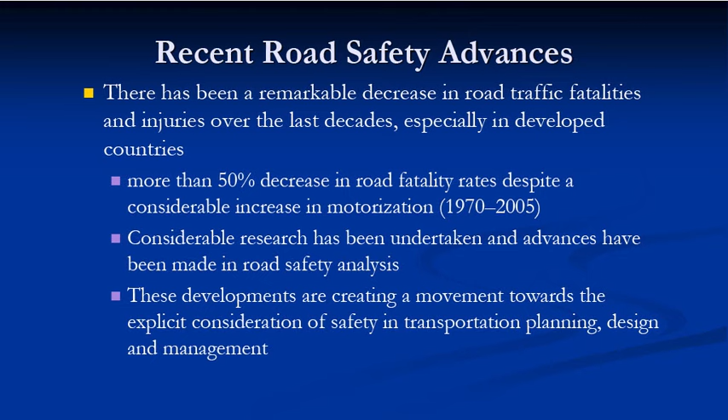The good news is that there have been significant advances made over the last decades in road safety. We have about a 50% reduction in fatalities, despite an increase in traffic volume and mobility. We have done a lot of research and made a lot of advances, and these advances are creating a movement towards explicit consideration of safety in transportation planning, design, and management. So this is the good news.

However, we also have some problems we need to take care of. Despite these recent advances, there are challenges complicating the future direction of road safety. Those of you familiar with fatality rates know that in recent years the fatality rate curve has flattened, and in many countries it is starting to increase. So the significant reductions we achieved in the past are not continuing. These challenges, in my opinion, include four main points. Most traditional research on road safety focuses on statistical techniques to model collisions.

We don't understand very well. Less attention has been devoted to improving our understanding of collision factors and how safety measures work. We just use police reports and numbers of accidents to fit a regression model and say we're going to use this regression model to identify black spots and treat them. Reliance on collision data is reactive, and it has fundamental ethical and practical issues.

This is extremely important. It has a fundamental ethical issue. To identify a location as having a safety issue, we need to observe collisions first. So to prevent fatalities, we need to observe fatalities first. People should die first before we intervene to make a location safe. Doesn't make a lot of sense.

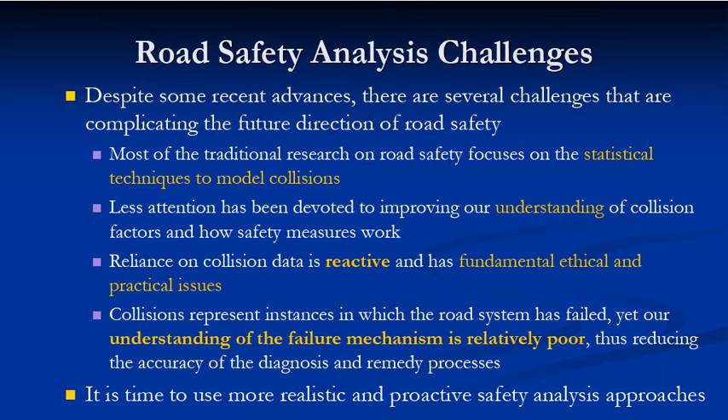Collisions represent a situation in which the road system has failed. Yet, our understanding of this failure mechanism is poor, which reduces the accuracy of the diagnosis and remedy process. It is time to use a more realistic, proactive approach to improve road safety.

So what are the new trends in road safety analysis? I'm going to list all of them, but I'm going to focus on the last four items. Explicit evaluation of safety impacts. Safety used to be an implicit evaluation based on expert knowledge and expert opinion. But now it is explicit, a separate evaluation from any other thing like travel time, delay, and mobility. We are quantifying that. We have the ability to estimate the number of collisions associated with a specific design or a change in a specific design.

We are moving away from rigid standards and warrants. It is not either we meet the warrants or the standards or not. It's now flexible. We can make a specific design safer by doing some changes. It is not yes or no.

We are going proactive. We are not waiting for collisions to happen before we intervene. We are using safety surrogates, and in my opinion, this is one of the most important advances that took place in road safety analysis—that we're not using collisions anymore. We're using safety surrogates such as traffic conflicts. We are including road user behavior in our safety analysis, which we couldn't do before because we didn't have the technology. And we are very excited about the new era of smart mobility and big data, which will allow us, for the first time, to do real-time safety optimization, something we couldn't do before.

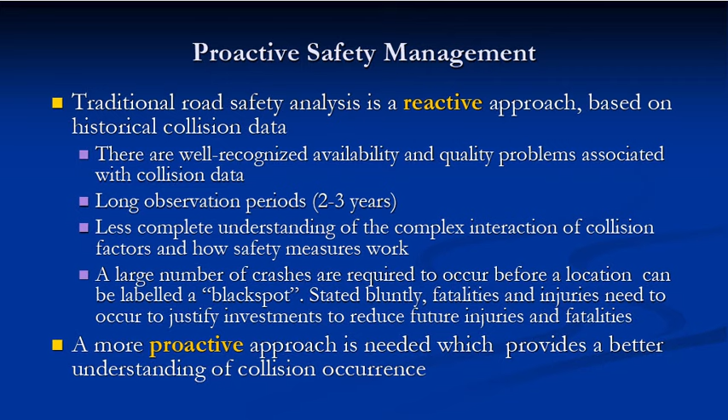So, stated bluntly, fatalities and injuries need to occur to justify investment to reduce future collisions. That's the reactive approach, with some unethical issues in my opinion. We need a more proactive approach, and this is where we go to surrogates.

So we started working on traffic conflicts. This started in Europe, actually, in 1980 or so, where people said let's use near misses or traffic conflicts. This is a very famous safety pyramid that many of you are familiar with. They said if we rank all interactions on this scale, you will find fatalities and injuries at the very top, followed by near misses, serious conflicts, less serious conflicts, and then undisturbed interactions.

But actually, this didn't go anywhere. There was a lot of hype about using conflicts in 1980 or so, but it didn't go anywhere, because the cost of collecting this conflict data was very high—it was done manually—and the reliability of the manual observers was very low.

Until about 2005 at UBC, my university, we decided we could automate this process using video analytics. So we started working in 2005, and we had our first system capable of detecting near misses automatically in videos in 2006. That was 16 years ago.

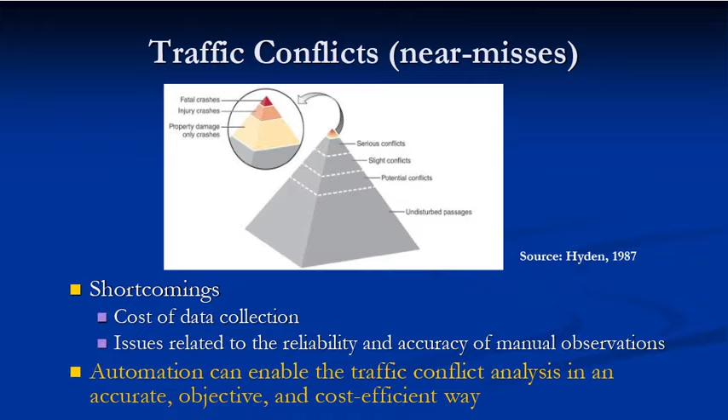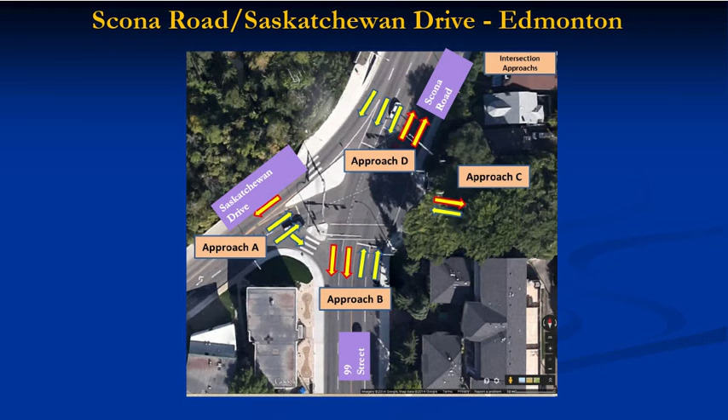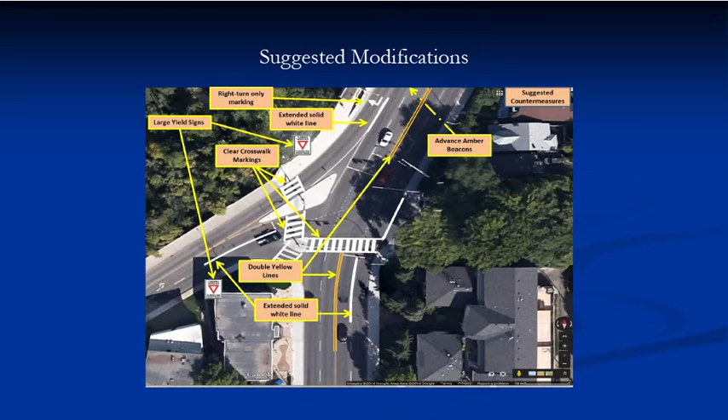And we can do before and after evaluation, which is a big application in road safety. We want to know whether the investment we make in improving road safety is working or not. With collision data, we need to collect about 3 to 4 years of collisions before and 3 to 4 years of collisions after, to do a proper statistical analysis. We produce all of these heat maps of where the problem areas are, and we get countermeasures, we implement them. This location, for example, did not see a collision following the treatments implemented for the last 5 years.

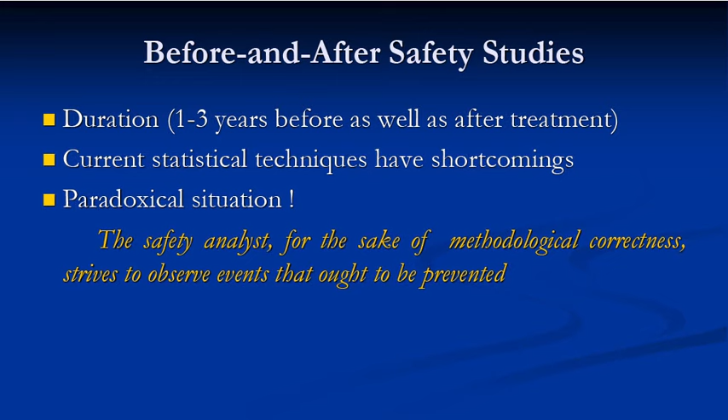And we can do before and after evaluation, which is a big application in road safety. We want to know whether the investment we make in improving road safety is working or not. With collision data, we need to collect about 1 to 3 years of collisions before, 1 to 3 years after, to do a proper statistical analysis. Not only that, we are interested in seeing collisions so our evaluation would work - we're interested in seeing the events we're trying to prevent in the first place for a proper evaluation, which again doesn't make a lot of sense.

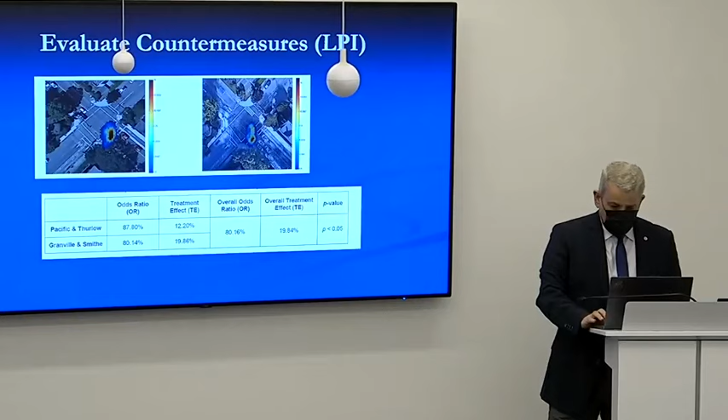You get about 20% reduction, depending on the volume. This 20% can go up to 30, 40% under specific circumstances.

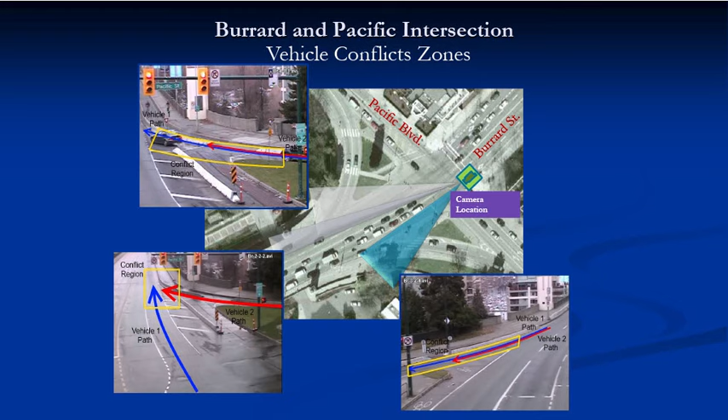This is one of the most important locations in the city of Vancouver, called the Burrard Bridge, where there were many conflicts between vehicles and cyclists going on the bridge. What we did is we closed this right-hand ramp and brought all the vehicles to a signal here. So this was closed, and we brought all the vehicles here.

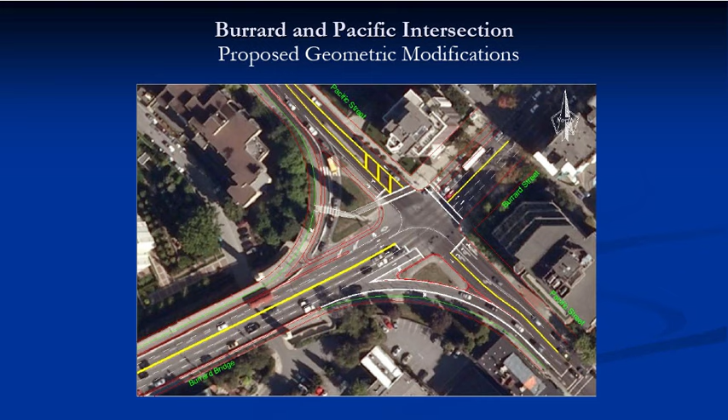And again, you can see immediate results. We did the video analysis, made all the geometric design changes, and you can see what happened to the reduction in near misses. Huge reductions by making the changes following an analysis of a few days as opposed to a few years.

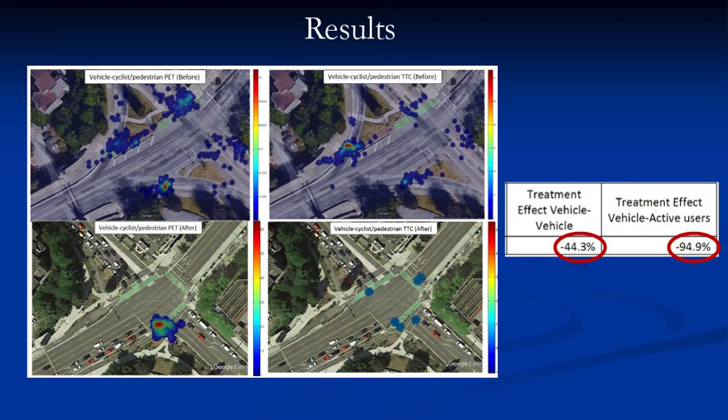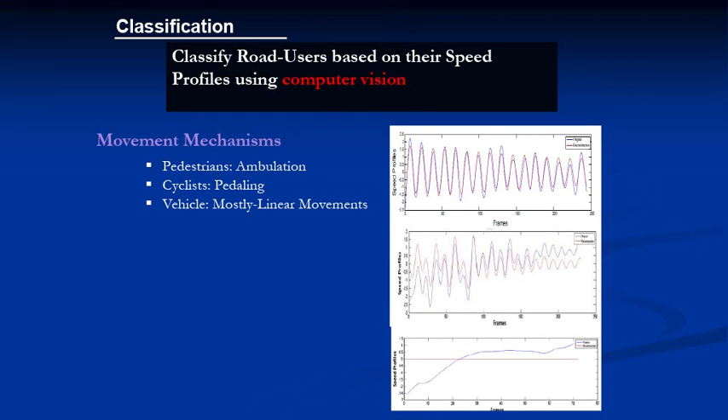So you get very detailed information, and we can use that in classification. We're getting about 85 to 96% correct classification rate, not from the shape of the object, but from the walking mechanism or the speed profile.

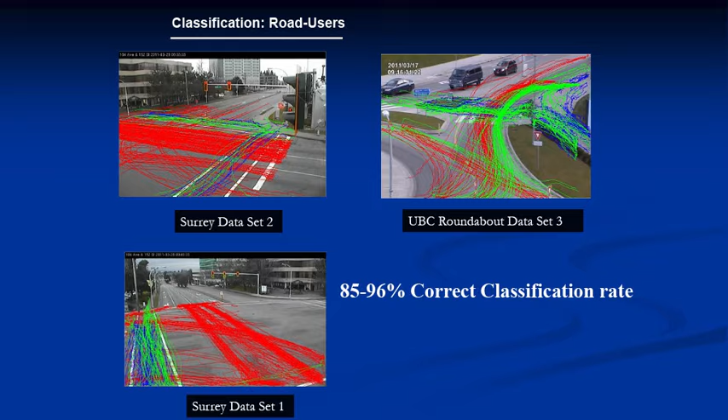We can point to a specific pedestrian, and for example, you're going to see this pedestrian. He will stop to talk to his companion. You see a drop in speed, and then they walk together. You get very detailed information about why things are taking place.

This is crossing speed in downtown Vancouver. A lot of jaywalking, people crossing from mid-block. And you can see that pedestrians crossing on the crosswalks are much slower than these violating pedestrians.

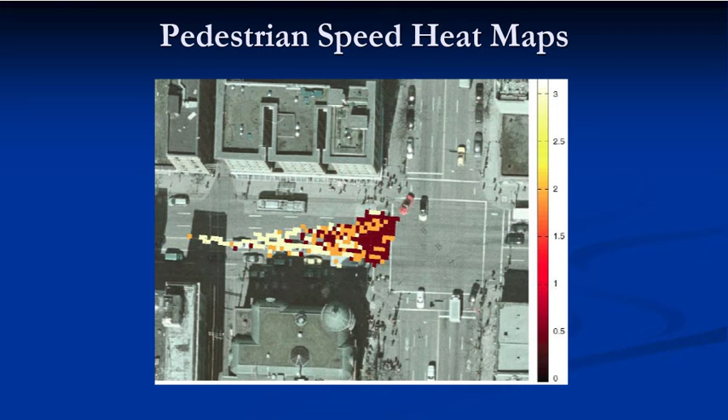This shows you how the crossing speed changes according to what phase you are in. You can see that violating pedestrians are really running at 2.6 meters per second compared to about 1.3 for pedestrians crossing on the walking phase.

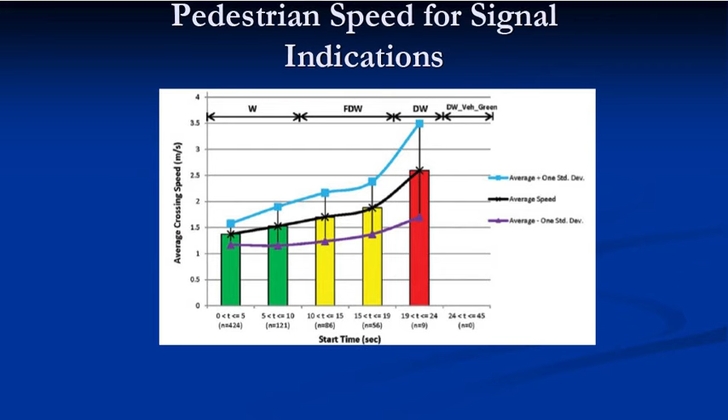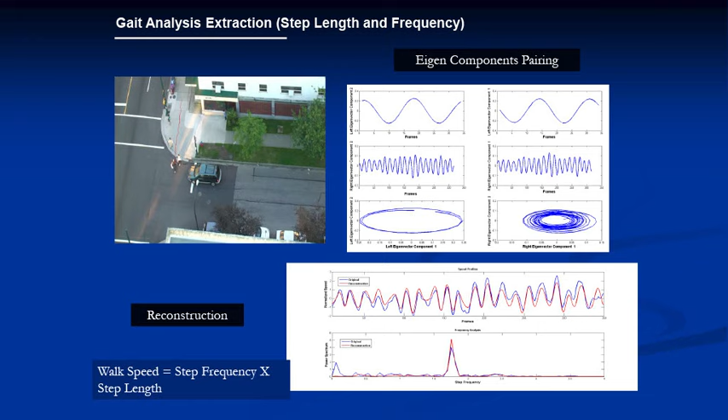As I mentioned, we can analyze the signal, apply all of these pattern recognition techniques. We get the step frequency, and we can get the step length from walking speed equals frequency times length. And we can use that in many things.

In this case, for example, we can classify gender by looking at the different walking mechanisms. Of course, it will never be accurate, but you get about 85% accuracy, just looking at the walking mechanism of the pedestrian without looking at the shape.

We can automatically identify evasive actions. You can see the pedestrian will start running, and here you will see the change in the step frequency.

We can apply some statistical techniques, permutation entropy for example, and you can see the change in the entropy. This value can give you a very good indication of the strength of the evasive action, which can also be used as a traffic conflict indicator.

This is some work that we've done in Vancouver to try to automatically identify pedestrians who are distracted while walking. Again, without looking at the shape, we're just looking at the walking mechanism and the dynamics of the walking mechanism. We get about 80% accuracy because the walking mechanism is quite different than pedestrians who are not distracted.

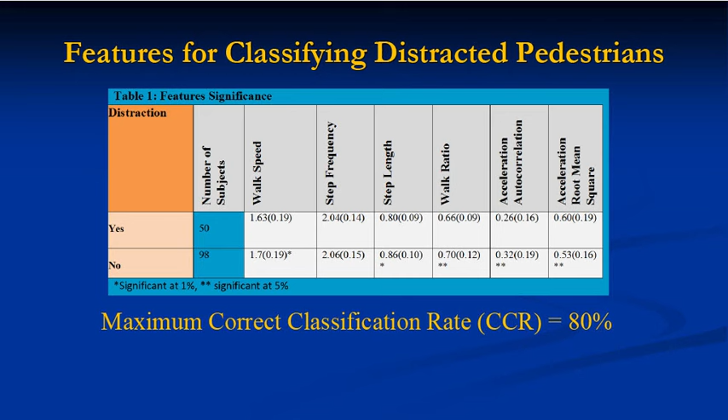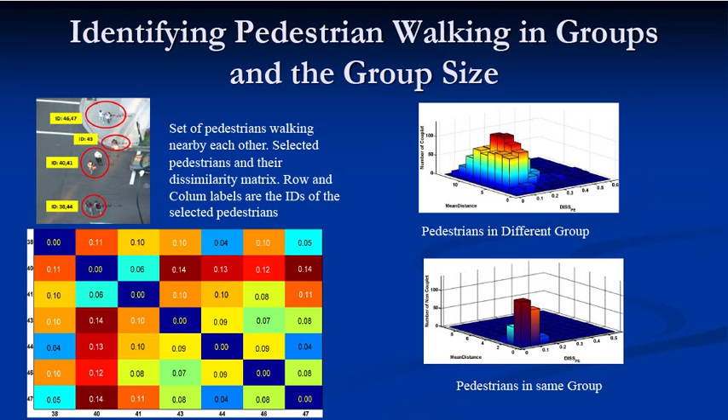We can tell whether pedestrians are walking in groups or individually by matching their gait parameters and speed profile. This is, for example, at UBC, cyclist speed.

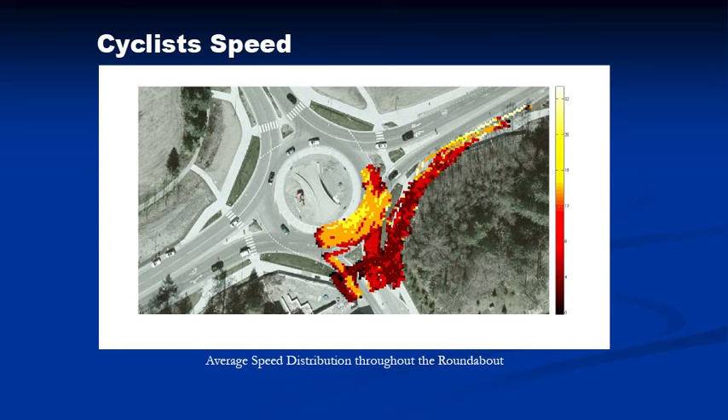You can see that cyclists who are using the sidewalks are much slower than cyclists who are using the regular lanes, and cyclists in the inside lanes are faster. Usually they are the more experienced cyclists.

You can tell whether a cyclist is wearing a helmet or not. You can point to the head, and from the head, you can tell whether there is a helmet or not. It's difficult to collect this data manually, and in this case, we got about 85% accuracy.

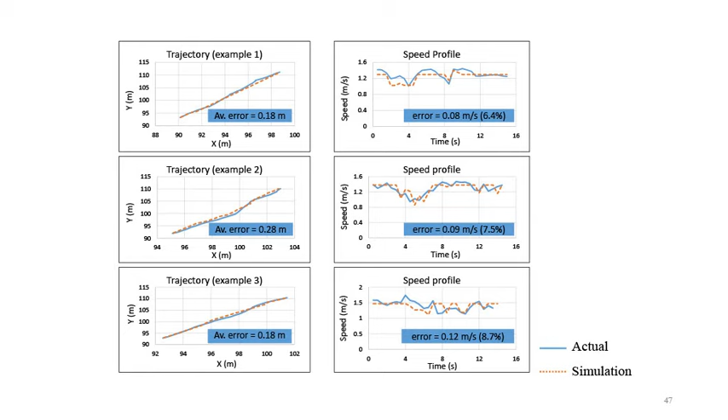We can model pedestrian movements using AI techniques. So we introduce these interactions to an algorithm, inverse reinforcement learning, and we can duplicate how road users are interacting. So when we develop simulation models, we can duplicate the actual behavior of road users in interaction, including conflicts and near misses. We can simulate them with actual behavior of road users.

This is an example from Vancouver. They have a big event in the summer, fireworks, where they close the downtown to vehicles. And in this case, one vehicle, one big van, entered the crowd, and it shouldn't be there. We tried to use our model to mimic how the group of 6 pedestrians here will respond to the presence of this van. You can see this is the actual trajectory versus the simulated trajectory.

And the shape looks not bad at all, how they interacted in speed profile to the presence of this van in the crowd.

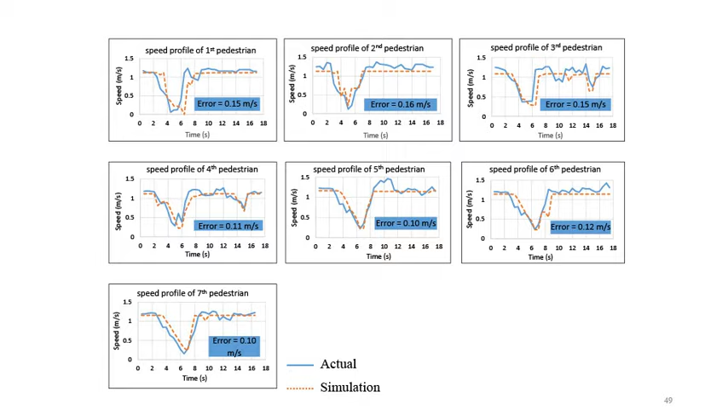The last thing I want to talk about is smart mobility, big data, and real-time safety evaluation. I'm very excited about this area. We are on the cusp of a new era of smart mobility. The application of information and communication technologies will make a huge change in the way we do business: designing, operating, and managing our road facilities.

Autonomous vehicles are expected to provide considerable social and economic benefits. There are still some issues because they haven't been evaluated very well, but we're expecting significant benefits. But in my opinion, this is the most exciting part of the equation: the big data that will be generated.

This big data coming from autonomous and connected vehicles will allow us to optimize the transportation network for road safety in real time, which we couldn't do before. So road safety engineers, when they talk to the traffic engineers, we were always at a disadvantage because we are using collision data.

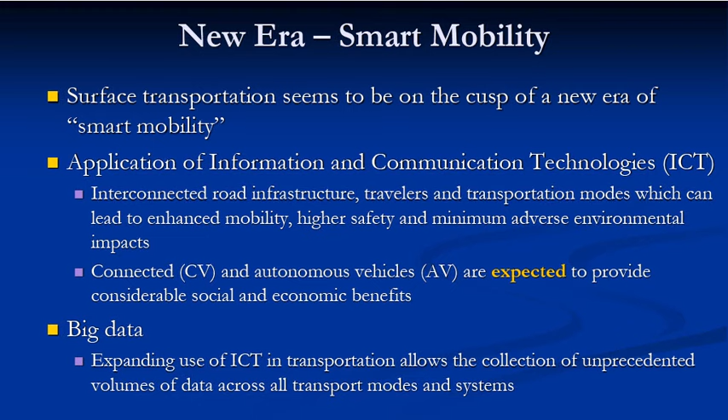They have a measure of vehicle delay that they can get every cycle or every 5 minutes, and they can optimize their system for vehicle delay. They can coordinate signals, they can do many things. We couldn't do that because we couldn't measure safety in real time. Now, with all of this big data, including vehicle trajectories, this will give us a chance of optimizing the network.

This would be a methodology that departs fundamentally from the past 50 years of reactive safety management based on population data. The real-time safety optimization, and there will be different examples.

We are relying on safety surrogates. We're not using collisions anymore in real time. We're getting vehicle trajectories, and we don't care where the vehicle trajectories are coming from. They can come from cameras, they can come from LiDAR, they can come from connected and autonomous vehicles. Any source of information for us is useful.

And now there is significant advancement in the technology of edge computing. There are many cameras now that can get these trajectories in real time at the intersection. So while they are collecting the video, they can give you the trajectories in real time. And real time doesn't have to be exact, even a few seconds late is still okay.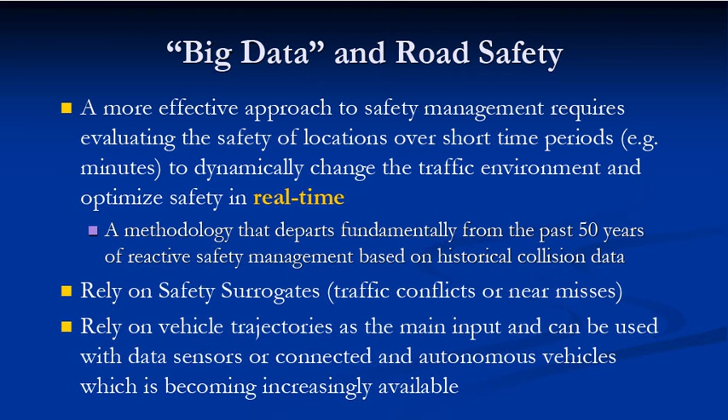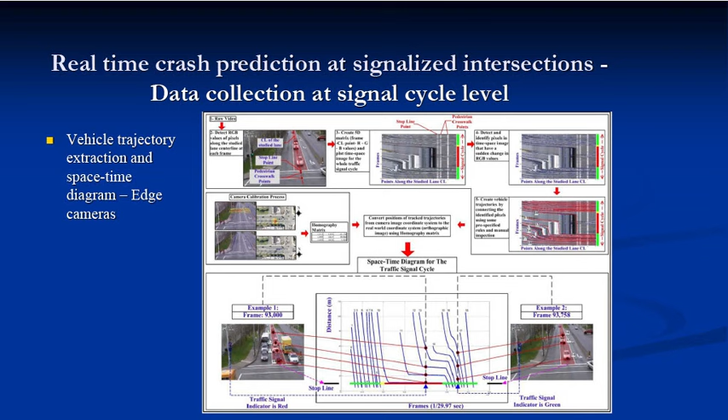This is an example from some work we're doing in Vancouver, where we're using edge cameras to get videos, and from the videos we get the vehicle trajectories. These vehicle trajectories can give me a lot of detailed information. In this case, we can get things like shockwave area, shockwave speed, many dynamic traffic parameters in real time that we didn't have before.

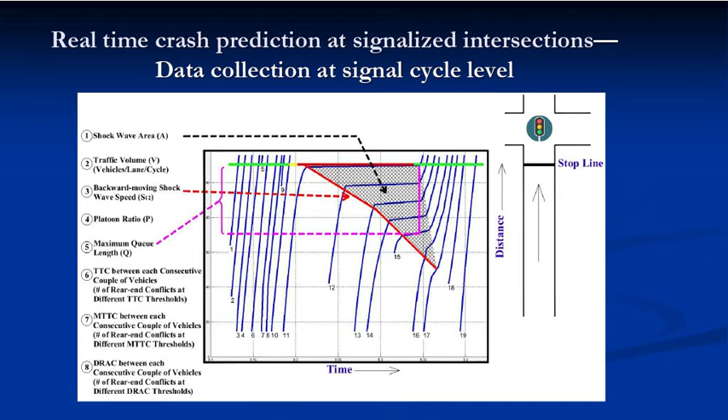We take these dynamic traffic parameters and the vehicle trajectories, and we use them to get conflicts and near misses in real time. We have statistical techniques to model these near misses and convert them to real-time crash risk. This is a technique called extreme value distribution.

We take the extremes of the traffic conflicts occurring in different time intervals, we fit a distribution to the extremes, and the tail of this distribution is our crash risk. And it works very well.

You can see that we can aggregate this small time interval crash risk to predict collisions per year. These are 4 intersections in British Columbia. The green line is the actual collision frequency that took place, and these dots are our estimate of the collision over the 1 year, aggregating these small interval probabilities.

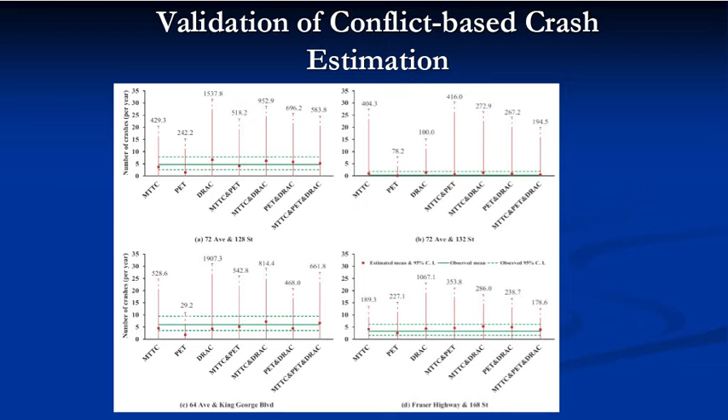We can use these to do many, many applications. For example, if you use Google Maps, you get your best route from A to B based on travel time. I can tell you which route will be the safest route, and I can have a multi-objective optimization for safety and mobility. The routes are not the same. Safest routes are not the most efficient routes from a travel time point of view.

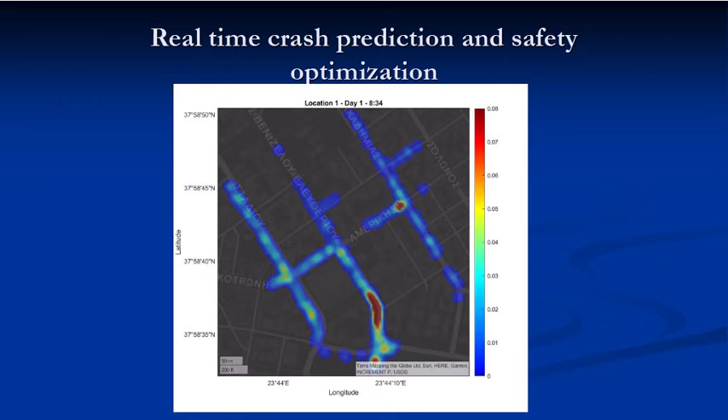They differ significantly. I can take these real-time measures and use them to optimize signals. Adaptive traffic signal control has been there for some time. There are many cities applying this, including Vancouver, and they try to optimize average vehicle delay in real time. I can do the same thing for safety.

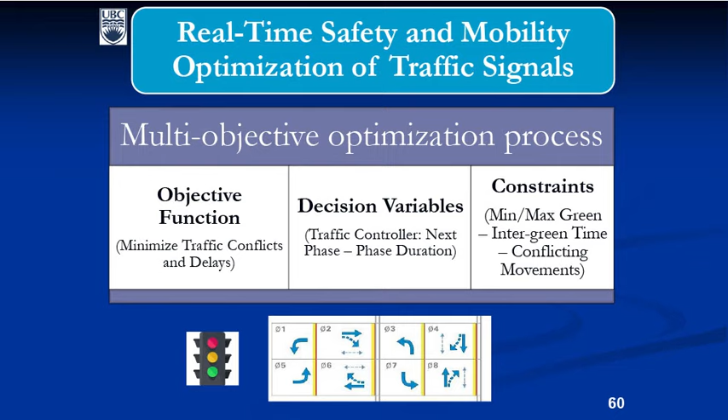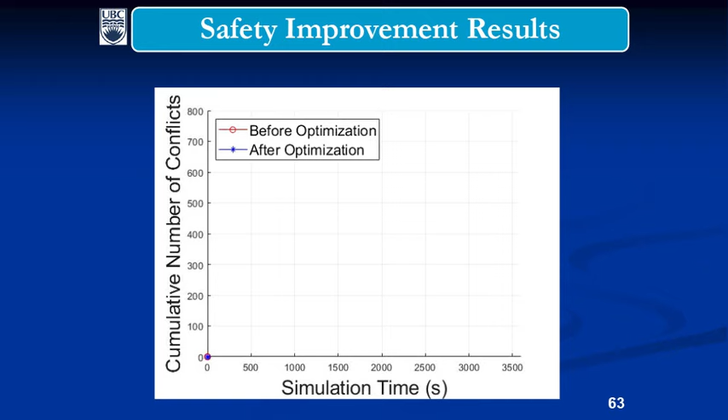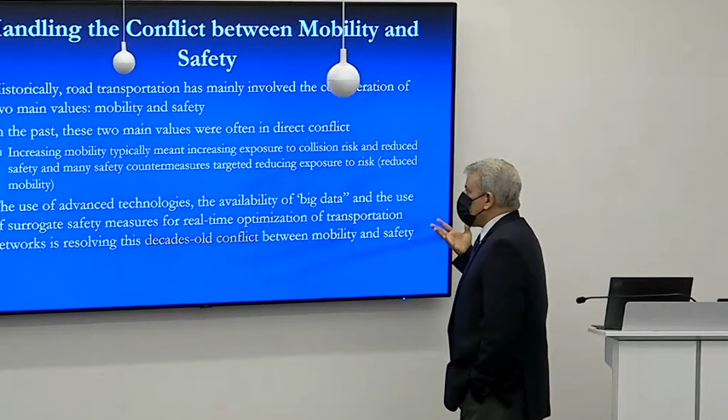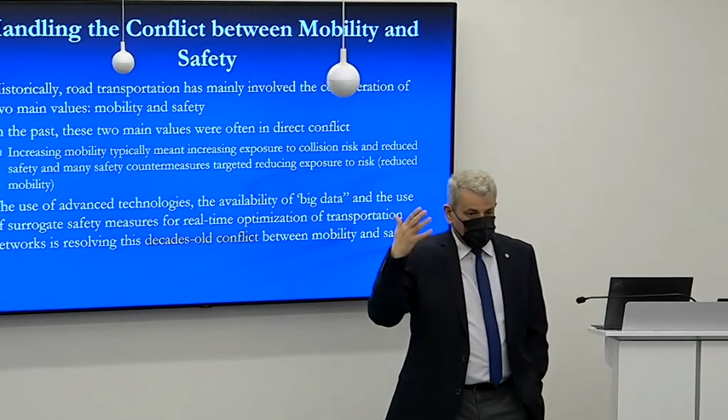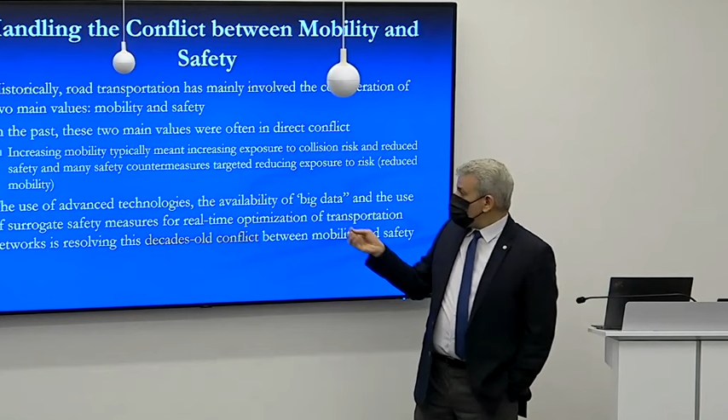The last thing I want to say is how we handle the conflict between mobility and safety. This is a very big issue. In general, road transportation involves the consideration of 2 main values: mobility and safety. There are other things like environment and air pollution, but these are the main 2 ones. In the past, these 2 main values were often in direct conflict, and most of the countermeasures we apply to improve safety meant reducing mobility, reducing exposure to risk.

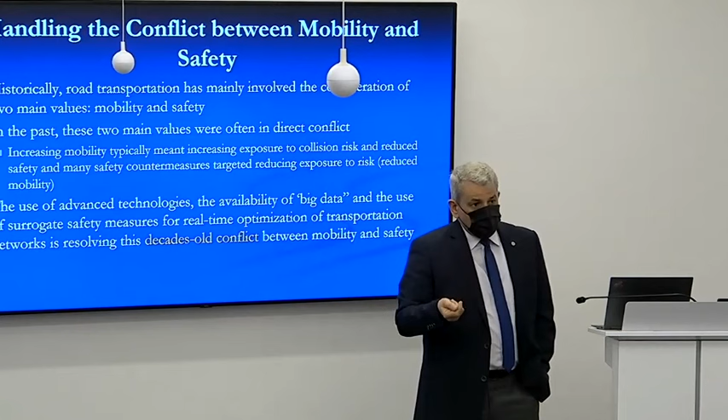For example, no right turn on red, no permissive left turn. We try to prevent mobility so we minimize interactions. But now, with these real-time safety measures, for the first time, we can resolve this decades-old conflict between mobility and safety. I can optimize for both mobility and safety.

So in summary, despite the recent success, the future of road safety is uncertain and faces many challenges. We cannot continue to rely on the reductions that happened over the last 20 years and assume that will continue. However, there are considerable opportunities in the application of new concepts: proactive safety, vision zero, safe system approach, and many cities are doing that now.

New technologies, connected and autonomous vehicles, advanced sensing and edge computing. In my opinion, this is the most exciting part, the big data that we are now generating, and we can use it to optimize safety in real time, real-time proactive safety management. And I cannot emphasize enough the importance of research, because research is really changing the ways we handle safety. We are very lucky in the road safety domain, because the gap between research and practice is very narrow. So many of these techniques that I've described today are already implemented in locations in BC and many other cities.